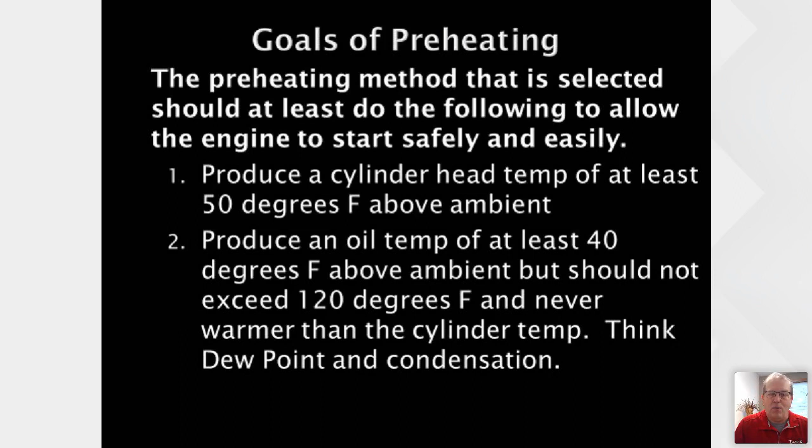But a critical part we've determined is we don't ever want to see the oil getting above 120 degrees from the preheating process, and we never want the oil to be warmer than the cylinder, because water beneath your oil can then evaporate and condense on parts of your engine that are not warmer than the oil. We're going to jump through a couple items of that.

And I always caution people, here comes the physics. Here's the engineer that loves talking about physics, and only the engineers like hearing it.

Water evaporates at any temperature. Even this past week when we were pushing minus 20, minus 30, water will still evaporate from a solid to a vapor. The rate of that evaporation process is the difference between the temperature of the water, or in the case of your aircraft engine, the temperature of your oil, and the ambient dew point, which is the dew point inside of your crankcase. Usually the same as your hangar, but sometimes not once you start changing the heating system. So the greater that delta, the more of it evaporates.

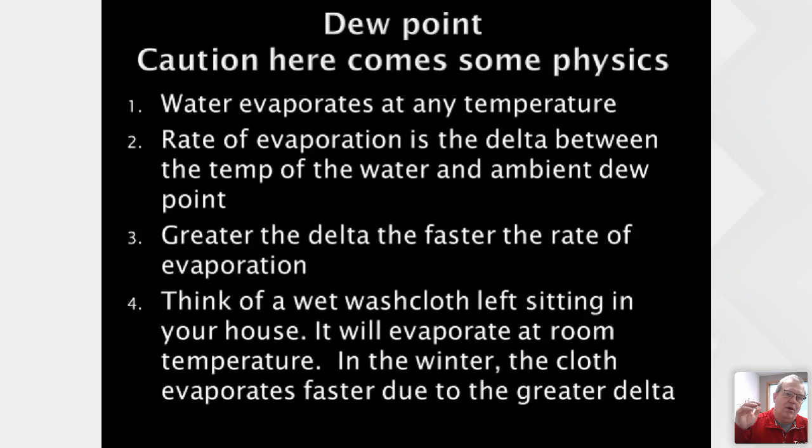It can condense if anything's below the dew point. Think of a washcloth left out in your house in the summertime—it'll stay wet for a long period of time, hours, sometimes even half a day. But in the wintertime, for those of us in cold climates with forced air heat, our dew points and humidity drop so much that the washcloth dries quickly. That's because there's a huge difference between the dew point temperature and the temperature of the liquid of that cloth.

So what do we do to help you understand that? Not everyone has Tanis preheat—there are different types of companies out there. So we prove results via tests we're doing all the time, but you can also do this even if you don't have an engine monitor. I'll go through a couple graphs quickly and show you what we do to make sure we're achieving the results we want to see.

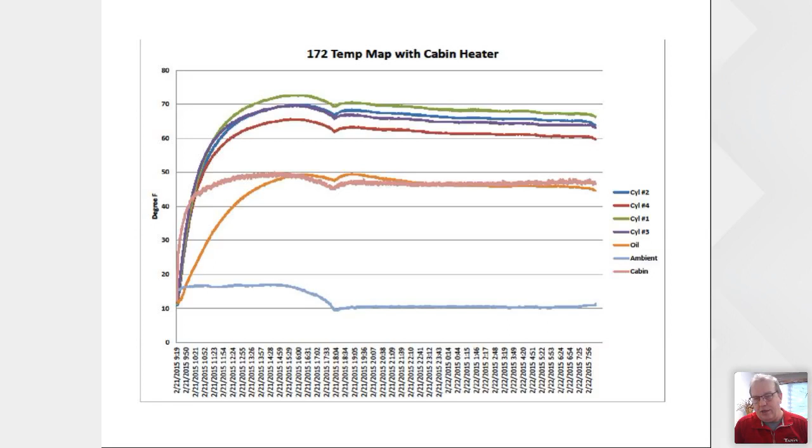If you need more than that 50 to 60 degrees above ambient, that's when you need to introduce a cowl plug or an insulated engine cover or your favorite blanket, etc.

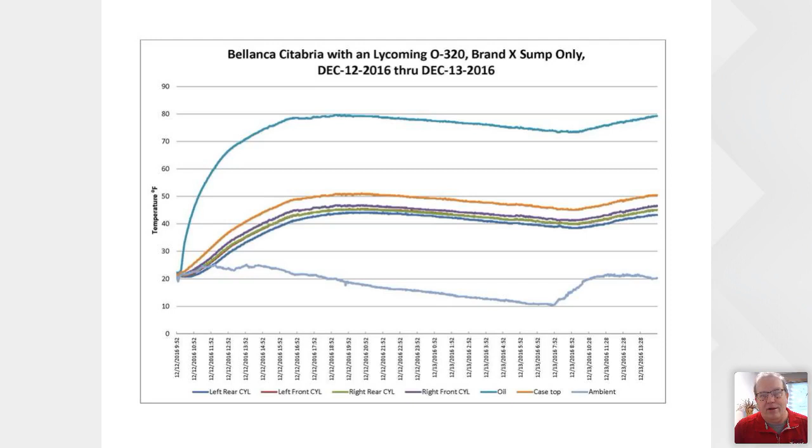We get tons of questions about people who just went to the hardware store or auto store and bought a sump-only oil pan heater, plug it in, and think eventually everything's going to get to be the exact same temperature. Here's where we really have an issue, because this is the oil temperature right here, and here is the temperature of our cylinders and the things above the oil. I don't have a dew point temperature, but your dew point is probably someplace right in here. Unfortunately, that sets up a process where condensation, moisture could condense on your rocker cover, your valve, your cam. And that's something we don't want to see happen. Thus we have that type of concern.

What is our product? You're going to see we have threaded elements that go into the cylinders, so that's what is right in this area. You'll see we put it into the intake tube of the Cirrus right at the factory, or on this Carbon Cub we're just placing our threaded element right into that intake tube, or it can go into any one of your rocker cover locations that we have shown right here.

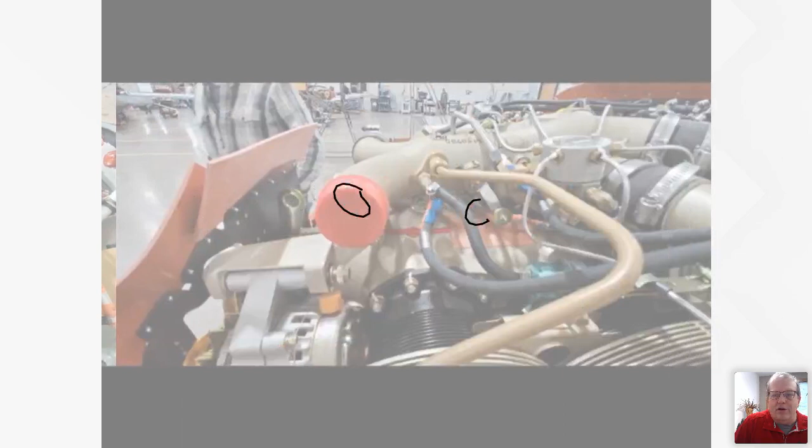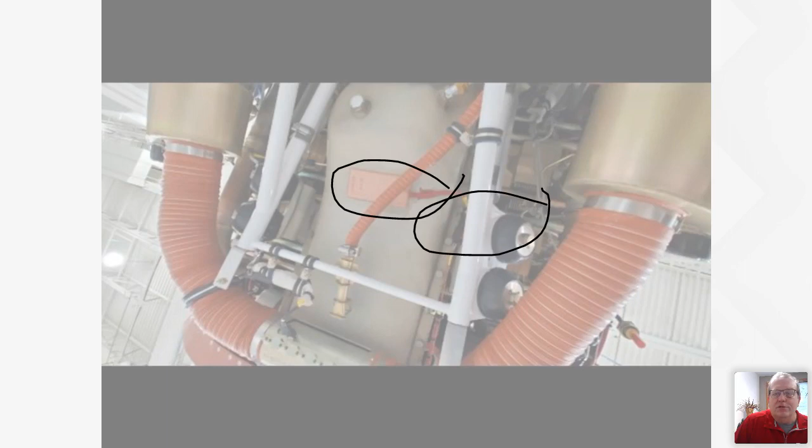This is at the factory at Cirrus. When you buy the aircraft, you'll see it's already installed in a split rocker cover - that's our threaded elements. And then we have pad elements: one on a 6-cylinder goes on top of the case, and one goes on the bottom of the oil sump to give you that temperature. On a 4-cylinder, we don't need the one on top of the case because we're getting enough heat right directly from the cylinders. We do have elements that can be threaded into a sump versus the silicone element that goes on there, but our common system is the silicone pad because that fits everything.

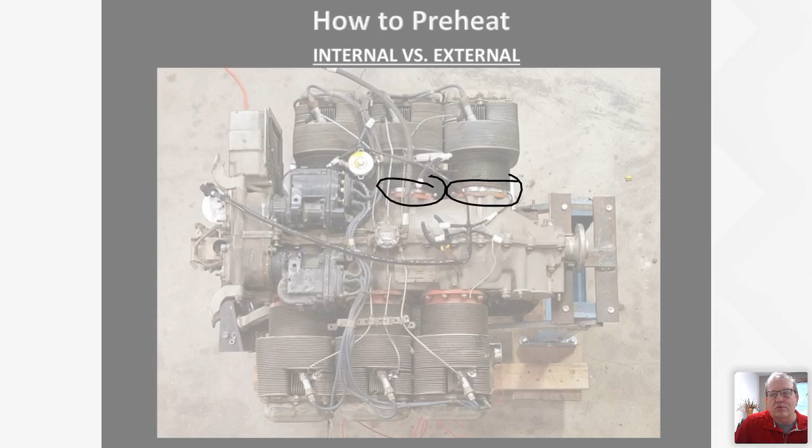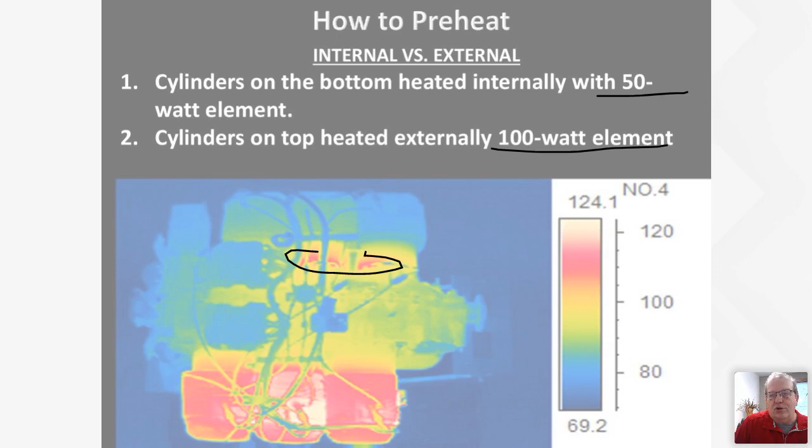We do also get questions. There is one other multi-point preheat company out there that uses a band, a hose clamp, a thin silicone element around the base of the cylinder. This will show you the difference between heating from inside the cylinder with a 50-watt element versus the base of the cylinder here with a 100-watt element. We're 50 to 60 degrees warmer, making sure that you do not have any concern of your cylinders being colder than the dew point.

So that's just a great little quick snapshot of what we do in the piston marketplace. We do have things in the rotor wing - we have cabin heaters, avionic heaters, APU heaters. We do heat batteries, and we heat a lot of things outside of the aviation industry.

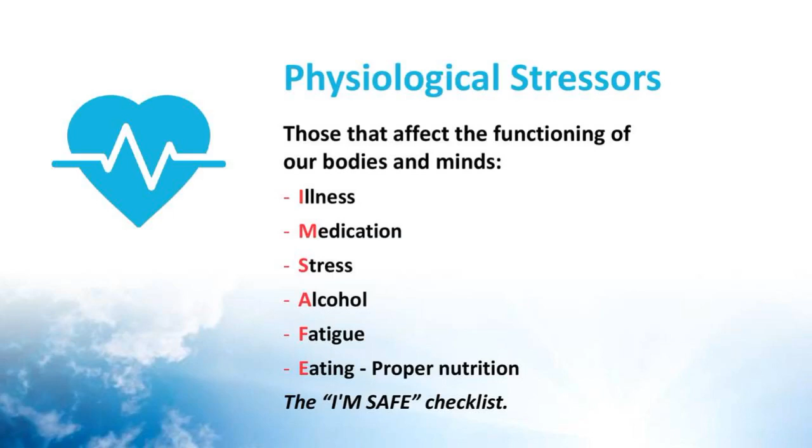Moving on to the physiological stressors, those affect the functions of our bodies and our minds. They include such common factors as fatigue and proper nutrition. And I'm sure you've all heard of and used, I hope, the I'm Safe checklist, which talks about illness, medication, stress, alcohol, fatigue, and eating, i.e. proper nutrition. We'll be talking about that more later.

Last but not least, the third factor is the psychological stressors, and these include a myriad of factors such as peer pressure, self-image, that nasty one, get-home-itis, and the hurry-up syndrome. There's a good article about 20 years ago in the AOPA Flight Training magazine that talked a lot about this. These stressors can severely alter our perception of the 5 elements of flight decision-making.

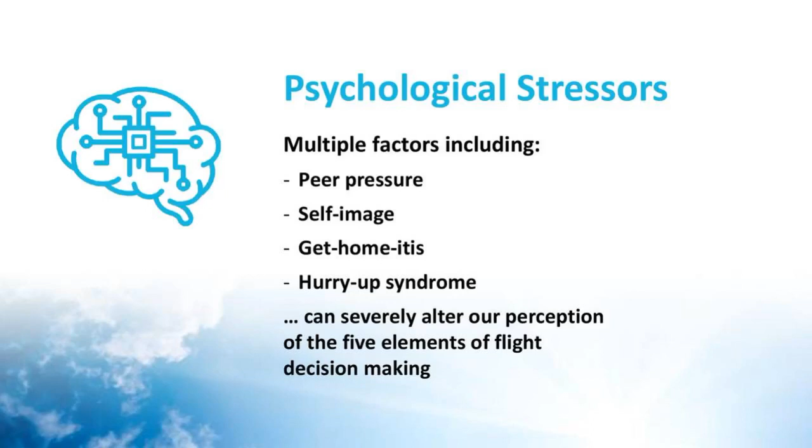Each really represents a trait or characteristic embodied in the psyche of every human mind. The key to maintaining a safe attitude is understanding the factors that influence each of these traits, and recognizing the situation when these traits may become prevalent enough to compromise our decision-making ability.

All right, let's move on to anti-authority. While most of us don't like to admit it, at times we all act as if the rules don't apply to us. Example in cars: speeding, rolling stops, amber lights. I won't go on about this. We've all done it, and if you haven't, well, maybe you're the rare pilot in the room.

We also rationalize errors in judgment. 'Their car came out of nowhere' is a classic statement like that. In the air, we find ourselves doing things that are not a good way of doing things at all. Abbreviating a traffic pattern, using non-standard entries, skipping checklists, flying a little closer to the clouds than you really should be, and in poor weather conditions that are legally allowed.

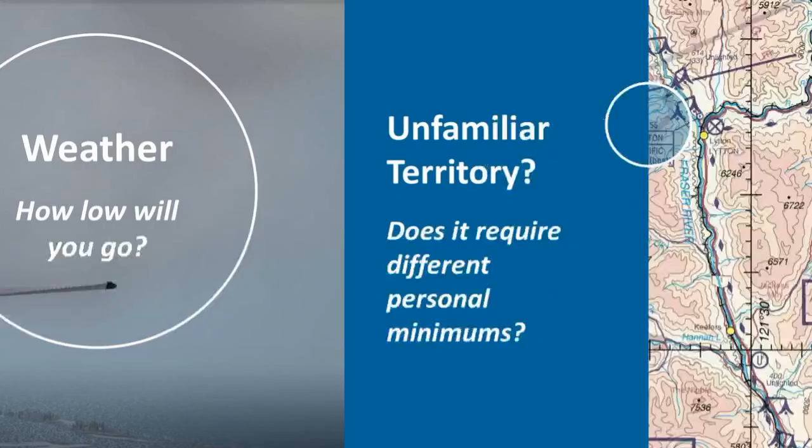Are you in unfamiliar territory? You know, this map depicts someplace in the province of British Columbia, right? There's all sorts of symbology there. That's the Fraser River, let me just get this whiteboard going here for a second. That's the Fraser River down here on this side of the screen, right? We've got this diamond route. That might be unfamiliar to you. Hopefully you're not discovering or needing to find that out when you're flying through BC.

So when it comes to ceilings, we need to remember a few things. If you're cruising with 2 miles visibility low over the ground, and your aircraft has a cruising speed of 120 miles per hour, that means you are passing over the ground 2 miles in a minute, which means with 2 miles flight visibility, you've got 60 seconds. That's all you've got. Pretty fast to keep concentrating on your flying, scan your engine gauges, and look for obstructions like towers in that 60 seconds.

And the second issue about ceilings is that it's not just clearance over obstacles. It's also the factor that provides you with the time to deal with an emergency. If one of those unlikely events happens, how fast can you find and prepare for an emergency landing from under 1,000 feet above ground? Wow, yeah, it's a good question. Did we think about it before we went flying?

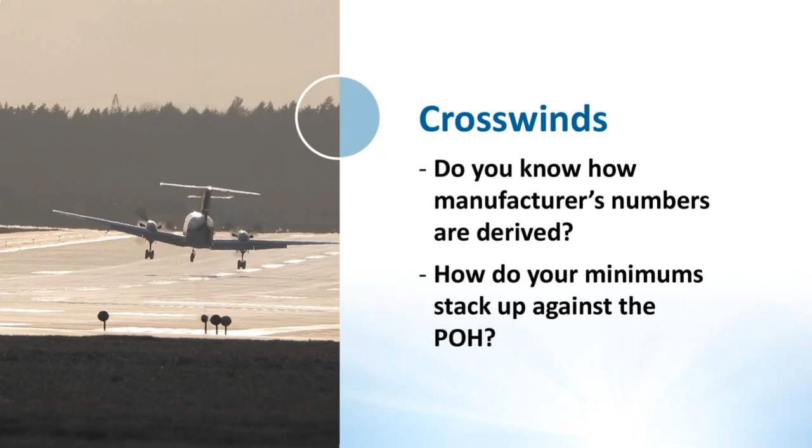And how do your personal minimums stack up against those in your POH? A lot of it has to do with recency and currency, right? Is there another runway that's more into wind? Maybe it's time to take it.

Fuel minimums. Legal versus prudent. As we all know in Canada, for an aeroplane, we only need 30 minutes of fuel. If you're flying something like a Cessna 150 or a Cessna 172, that 30 minutes may only be 2-4 gallons total on board as a minimum, plus of course the unusable fuel, right?

So what are your personal minimums? We saw earlier in the video today where somebody was talking about having an hour. Okay, sure, that's better. What's prudent? How far are the airports that you could land at along this route you're going on, if it's cross country, right? And by the way, there are no minimums for ultralight aircraft. Maybe your limits need to be higher than the legal limits for fuel.

We're going to go with a fuel management video now, which I think is a really good thought provoker. Let's watch it through to the end and really get something out of this one.

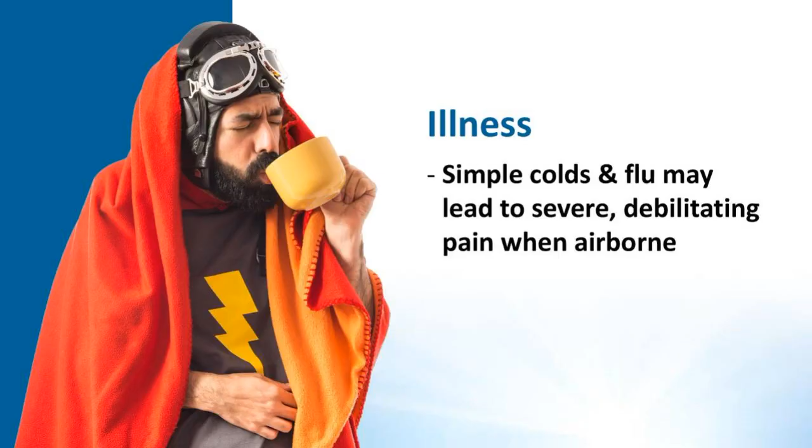On the heels of illness is medication. Pilots are often tempted to use OTCs, over-the-counter remedies, to mask the effects of an illness such as a cold. These remedies may have side effects that we're not necessarily aware of, or that aren't on the box. Anytime you're going to medicate, you want to tell the person prescribing something to you that you are a pilot and that you are actively flying.

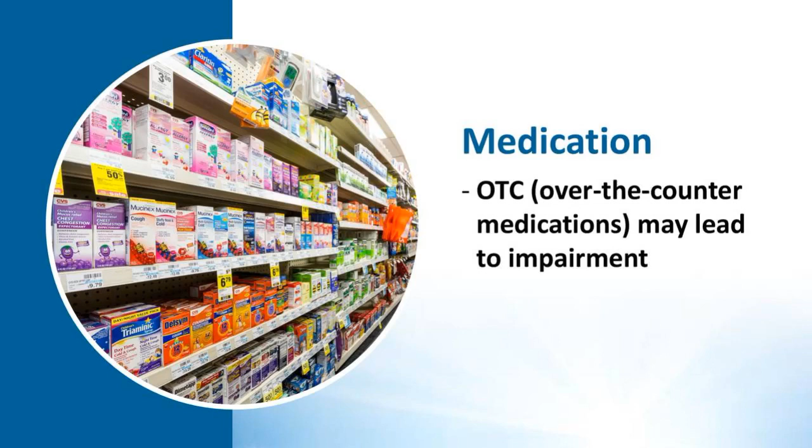Stress comes in many forms. It can alter our decision-making ability. Remember that the psychological stresses of work, school, family, and our personal life are carried with you into the cockpit and can degrade your performance immeasurably.

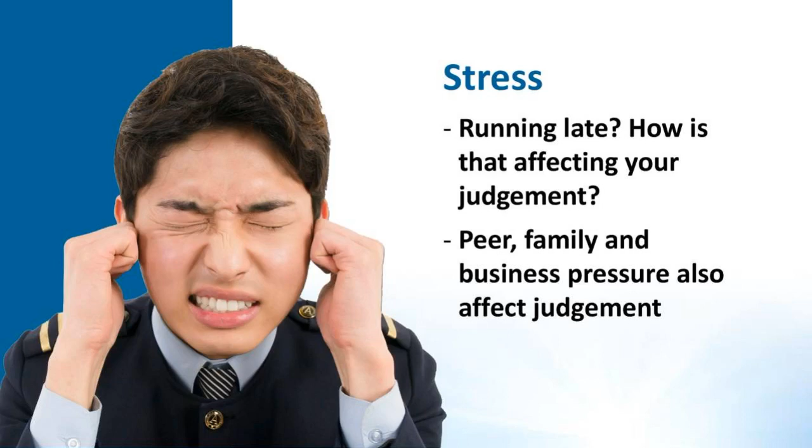Physical stress, such as being too hot, too cold, or moist, can all take their toll on decision-making. Hard work and the resulting soreness and fatigue can also compromise you as well. How much snow did you shovel this week? How physically fit do you feel before you go flying?

Alcohol. All pilots should know better than to mix alcohol with flying. We know about the 12-hour bottle to throttle rule. Used to be 8 hours. That's a bare minimum, right? And a lot of drinks may require a longer recovery period. Remember too that many cold remedies may use alcohol as one of the active ingredients in the medicine, so be certain not to use these before flying.

It's really difficult to think clearly and rationally when you're overtired. Maybe you're falling asleep in the cockpit. Mental abilities such as motor coordination can be severely compromised when a pilot's tired. If you don't have adequate rest, don't fly.

Eating. Nutrition is the last part of the I'm Safe checklist, and it's probably the most important, because if we haven't been well fed and well hydrated, our mental processes are going to be deficient. You need to have fuel in your system, and that fuel is food, to have your body perform at its best.

As we talked about a few slides ago regarding developing your own personal minimums, write them down. Once you've developed them, write them down and keep them with you. Don't leave it at home. Use it as a guide or template every time you go. From time to time, reassess those minimums during periods of either greater or lesser activity, as the minimums might need to be raised a little higher.

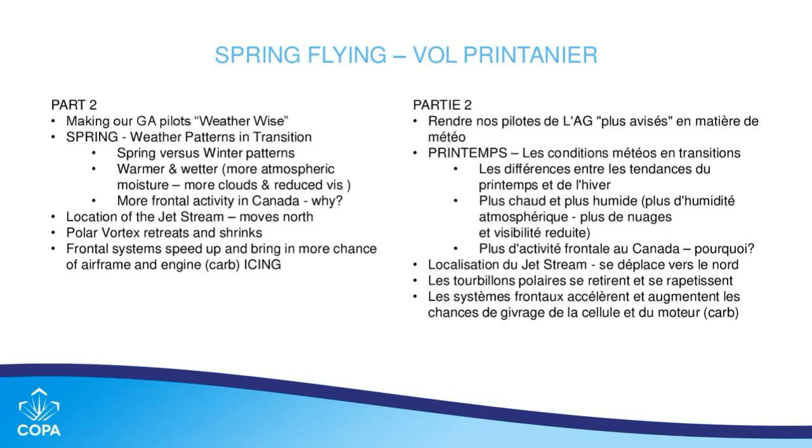One of the references, if you haven't looked at this book in a while, I strongly recommend it for bedtime reading, or if you want to read stories to yourself before bed, it's a great reference: the Air Command Weather Manual, now called the RCAF Weather Manual, but it's basically the same book.

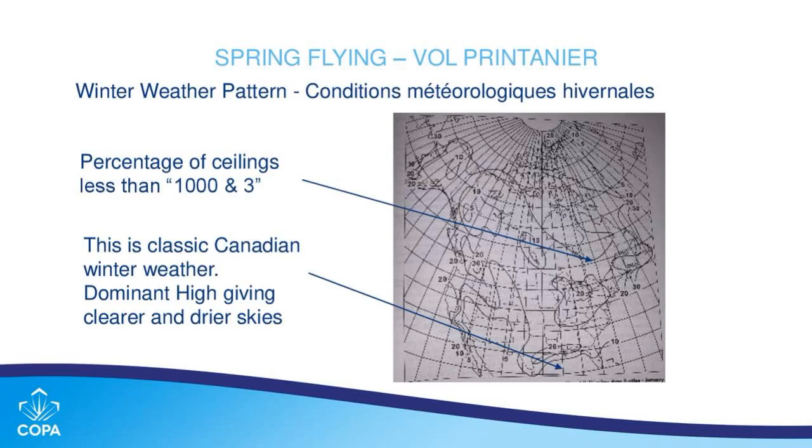These 2 pictures on the next 2 slides were taken from this book. This isn't a great picture, but it shows percentages of ceilings less than 1,000 and 3. This is wintertime data. If you look at this area of Canada, guess where that is? That's the Arctic, that's our polar vortex sitting up there. As a result, we've got lots of cold, clear air pushing down to the south, pushing all that warm air out of the way. So the percentages of 1,000 and 3, basically VFR versus IFR, are very low unless you get down near the lakes in this area. This is that classic winter weather situation like we saw last week.

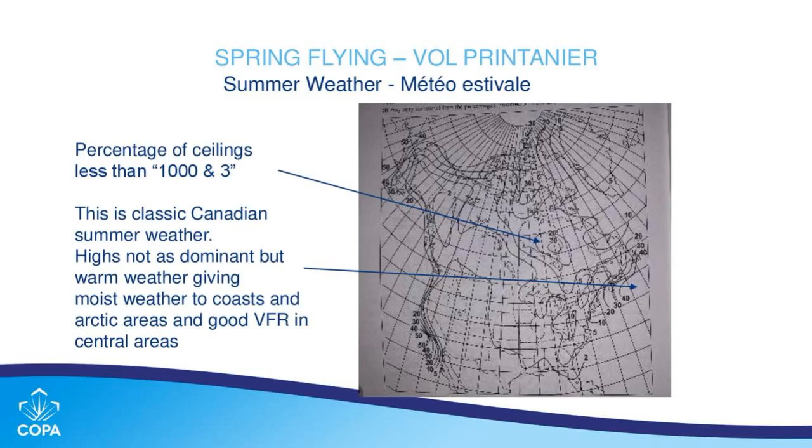Then as we move into springtime and see summer weather, we see just the opposite. Now the polar vortex is sitting up here, much smaller, not nearly as present. We have a jet stream going sort of from southwest to northeast. As a result, areas in Canada that had fairly low percentages of 1,000 and 3 are now up in the 20 and 30% range in the James Bay area, and down here on the East Coast with lots of moisture moving up from south to north, lots of moist air, lots of coastal weather in the Atlantic region. So a significant change from what we saw in wintertime to what we see in summertime, and in between that, of course, is spring.

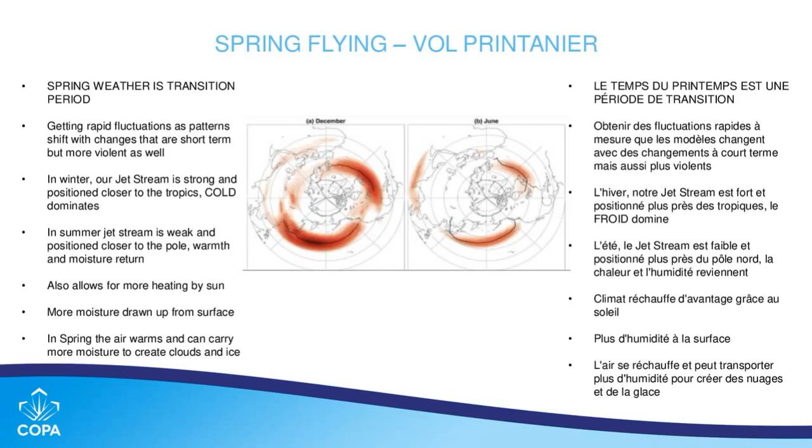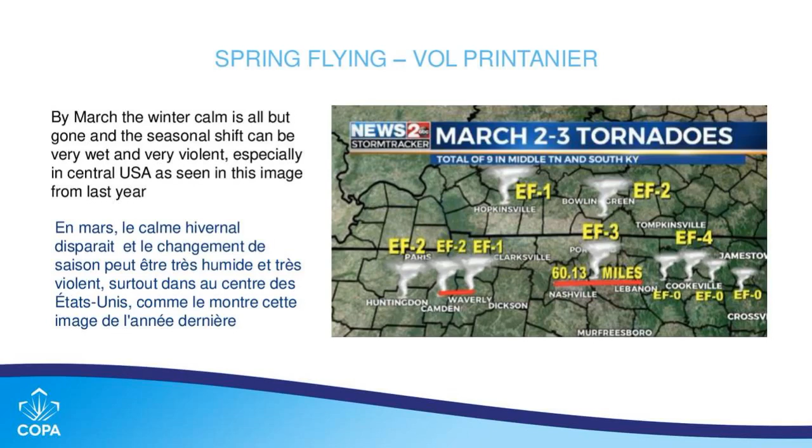So when we're getting ready to fly, we need to think about a bunch of things in the springtime, right? Air temperature versus dew point. Relative humidities are climbing, the air is moister. Therefore the difference between what they used to call the dry bulb and the wet bulb thermometers is diminishing, and that means the air mass is changing and its characteristics are changing.

Surface temps are a lot closer to freezing, which means our parked aircraft may frost over or ice up more readily. Temperatures aloft are now warmer. That freezing level, which we probably looked at all winter long on our GFAs, there was no freezing level because it was at the surface, right? Now the freezing levels are aloft, which means we are going to have an above freezing layer that we may end up climbing into a below freezing layer.

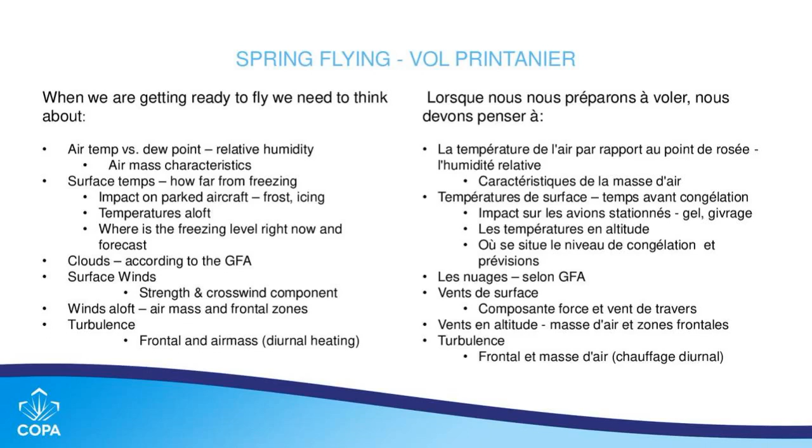And if you're a glider pilot, hurrah, right? We now have all those lifties that we want to have to get us and keep us aloft for longer. But it can also bring with it a lot of moisture and cloud producing from those same vertical currents.

One of the things that we enjoyed during the winter, which starts to diminish and was talked about in a couple of the presentations we saw in part 1, is the whole aspect of aircraft performance planning. As we transition to spring, our weight and balance considerations need to be reweighed and reconsidered.

Winter kits, those big bulky wing covers and airplane covers and windshield covers, let's get rid of them. We don't need them. We don't need to carry around stuff that's not valid right now. Winter kits and covers not required. So now the aircraft probably has a lesser empty weight than it did before. What about survival kits? Maybe they need to be changed as well.

This all means that we could be ending up with more room to carry fuel, or more passengers, or more cargo. And those passengers may actually weigh less because they're not carrying all that winter kit with them. The AIM gives us winter and summer values for adult males and females, and we should use those as guides if we don't know the accurate weights of our passengers. As it says, add 10% to whatever you're offered as a weight, because people are probably a little bit humble about what they're actually weighing.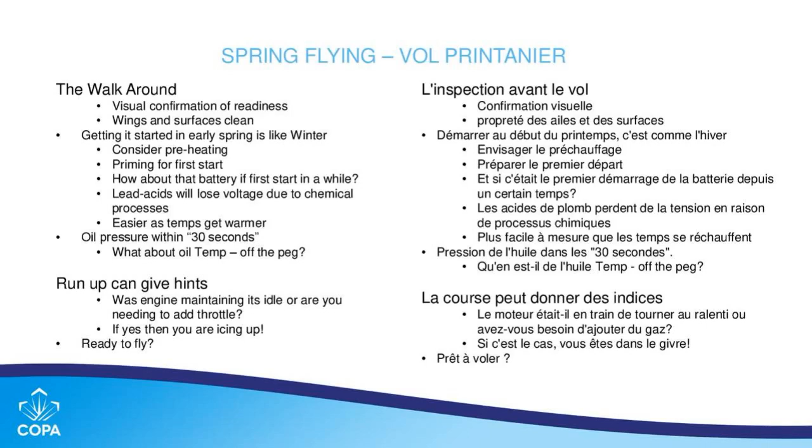As we said in the last presentation, the critical thing is now we're going to take this airplane flying. We don't know. We can do a lot of calculations and a lot of expectation, but that first full application of throttle, how is that engine responding, right? We should be prepared, as Mr. Blaze said, the wager: plan for the worst, hope for the best, right? Be prepared.

Okay, takeoff and cruise. If it's not bare and dry, then beware. If you're not using a go, no-go plan, please start doing one. Pick a spot reasonably down the runway where if you're not airborne by that spot, you've got room to stop. And if you're at that spot and you're not airborne, then stop. There's a good reason for it. It's called safety and being able to stop when things aren't going well. Because otherwise, all you're doing is painting yourself into a corner that you don't want to get out of or can't get out of.

If you're in cruising flight and the aloft temperatures are between +5 and -5, then you're at a very high risk of carburetor icing. Even if you've got a fuel injection system, there are still risks to the engine at those temperatures.

Are your engine oil temperatures and pressures still in the green? If you're a person who's a single weight oil user, and they're still out there, is that winter weight oil now a little too thin? It could be that as the temperatures rise, and if you haven't flown much, that winter weight oil needs to be changed out either for a multi-weight oil, an all-season oil, or a summer oil at a higher viscosity.

When we think about precipitation, clouds, and visibility, between that +5 and -5 degrees Celsius, we're in the high risk zone. We should treat any precipitation in that area as icing highly possible, highly potential.

So just to drag us back here for a second to something that some of us probably haven't seen in quite a while, is a carburetor icing chart, okay? So you can see there's basically 4 zones. There's serious icing at any power. There's moderate icing at cruise power, which is also serious icing at descent power. There's serious icing at descent power, and then there's light icing at cruise or descent power. And basically you've got rings here.

This kind of yellowy ring out here is basically saying that if the temperature example is minus 20 or minus 10, and the outside air temperature is also about the same, minus 10, the intersection of those 2 points puts you about here, right? Light icing, cruise or descent power. But if you are, say, plus 10, and an air temperature of plus 10, guess where you are? You're probably in cloud, but you're also in serious icing at any power setting.

Now, at the intersection of air temperature and dew point, we see the fact that the engine would be experiencing carb icing. So there's 2 boxes here. At 8 o'clock in the morning, which was just before the flight, the temperature was plus 6.5 with a dew point of minus 0.7. So if we take plus 6.5 and we go over, we're up in this area, so plus 6.5 right in here, right? We're on the edge of serious icing.

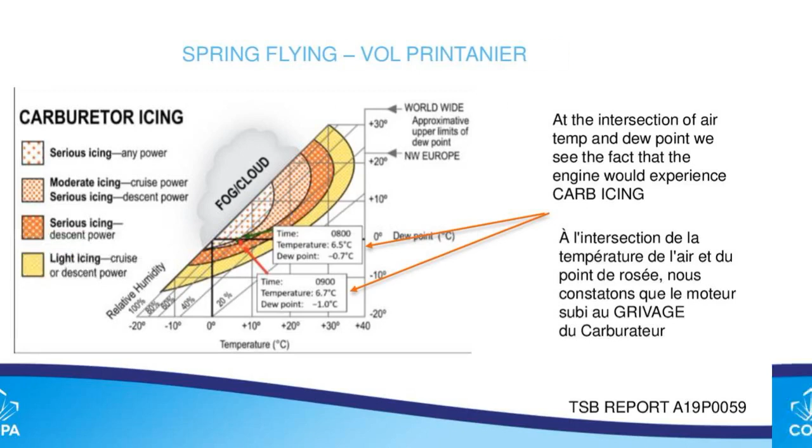So some of the aftermath of this situation was that in 2 recent accidents in the US, there were indications of carburetor icing on similar aircraft with the same engine modification. In fact, signaling that these aircraft may be more susceptible to the accumulation of carburetor icing than the original. In the area of the accident, the temperature and humidity in the area of the flight were conducive to serious carburetor icing at any engine power setting.

Unfortunately, the pilot had no way to tell that he was at risk because he had nothing in his cockpit to tell him what the carburetor air temperature was, and so might have been rather blithely ignorant to it. His experience with carburetors didn't trigger an adequate and timely response to initial indications - a slight drop in manifold pressure, but no change in power, in RPM.

One of the interesting things about this aircraft is that it was a constant speed propeller design, as opposed to a lot of light aircraft flown by GA pilots with a fixed pitch propeller. And we know that in a fixed pitch propeller engine, any indication of carburetor icing tends to show up as a drop in RPM, and that tends to be the trigger that we're all used to looking at. Unfortunately, with constant speed engines, that slight drop in manifold pressure is a much subtler indication. And a propeller RPM drop does not manifest itself until the engine is severely affected by carburetor icing.

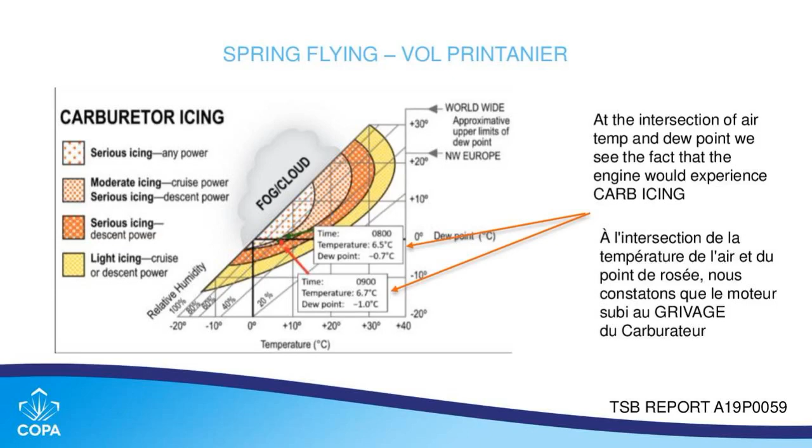So this is one of the biggest issues and one of the key points we want to get reinforced today: this carb icing threat that comes on the heels of winter flying in springtime, and to a certain extent also during fall flying.